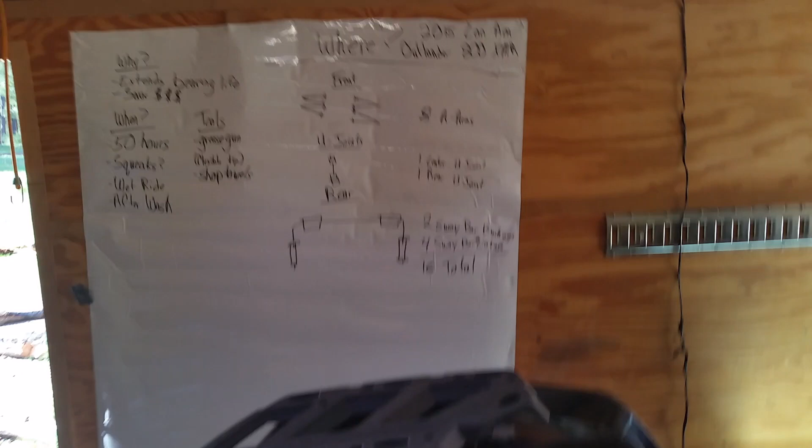I just cleaned up this 2015 XMR Outlander for its new owner. So y'all know what that means. It is time to grease it. Now, no one really enjoys jacking up these machines and getting under it to grease them, especially including myself, but I want to spend a few minutes talking about it this morning and show you the 16 grease fittings I found on this machine.

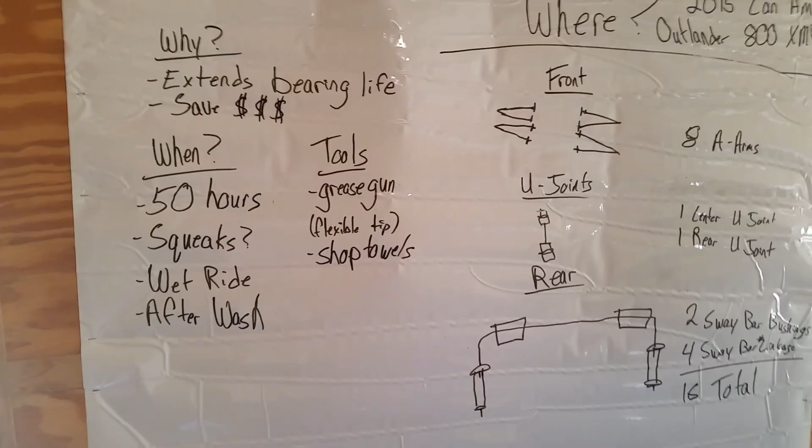Real quick, I wanted to address why to even grease these in the first place, and it'll extend our bearing and bushing life, and if it'll save the new owner money, that makes me happy, so good enough reason for me. The only other thing I wanted to address is when to do it, and the manufacturers mostly say around every 50 hours. Really, I like to do it anytime the machines start squeaking. You know, that'll help after a really wet ride or after a good thorough cleaning like we did on this one this week.

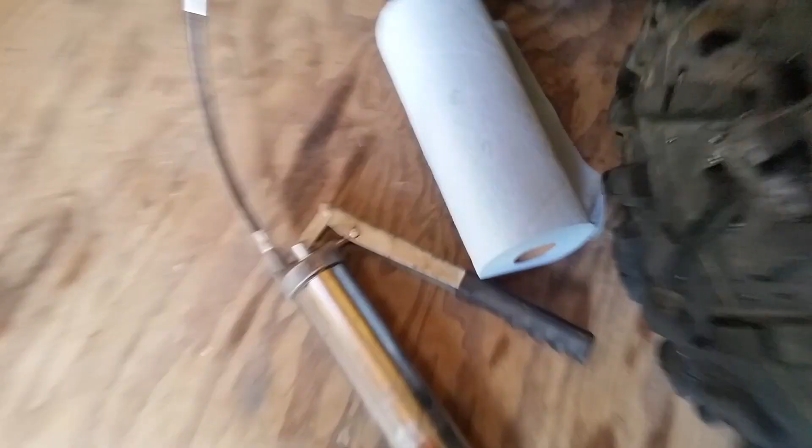As far as tools go, it's a really short list. Just a jack, a grease gun. I suggest one with a flexible tip. I got this one on Amazon for 20 bucks. A ton of shop towels, and that's about it.

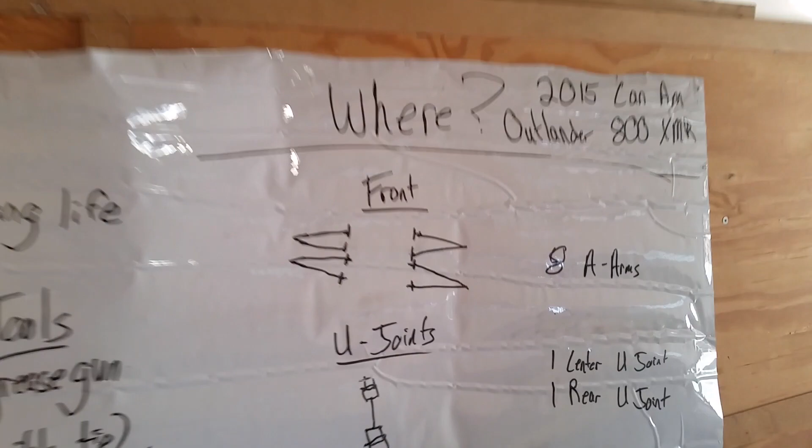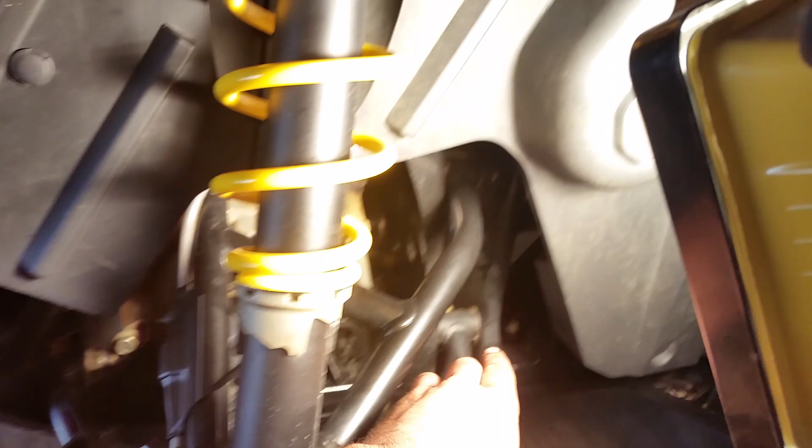So as far as where the 16 grease fittings that I found are located, I want to start in the front suspension, and that's with the A-arms. I found 2 on each of the upper and 2 on the lower, so 8 total in the front. We got one on the lower right there. Another on the lower, and to reach him you'll actually have to come in from the other side.

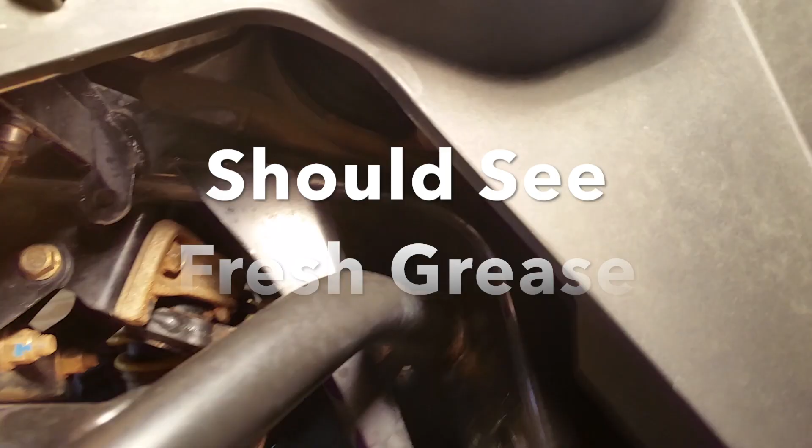And then 2 on each of the upper. Let's see if we can get in here and see him. You'll have to get that one from the other side as well. And then that one right there on the upper left. And of course the same thing for the other side.

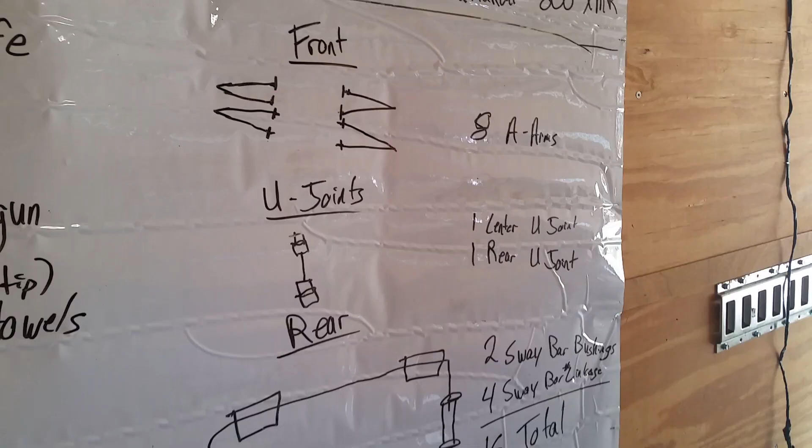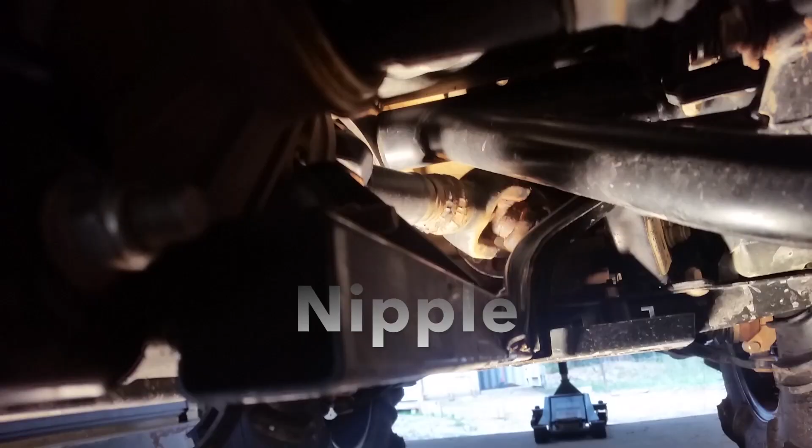Moving on to the U-joints, I only found 2 there. One on the center shaft right behind the transmission, and another on the rear U-joint right in front of the rear diff. Now our 2 on the U-joints are going to be this rear one right by the rear diff and this more center shaft up there. And when we jack up the bike, we can turn the wheels to get the fitting to line up with the skid plate so we can get to those. Another 4 inches. And stop. Perfect.

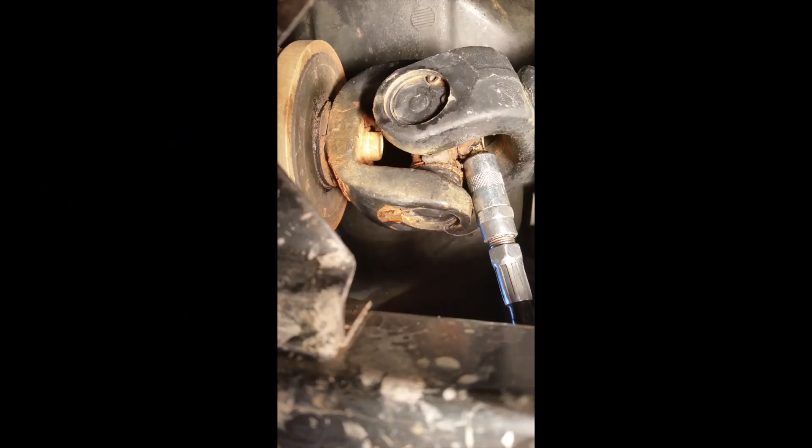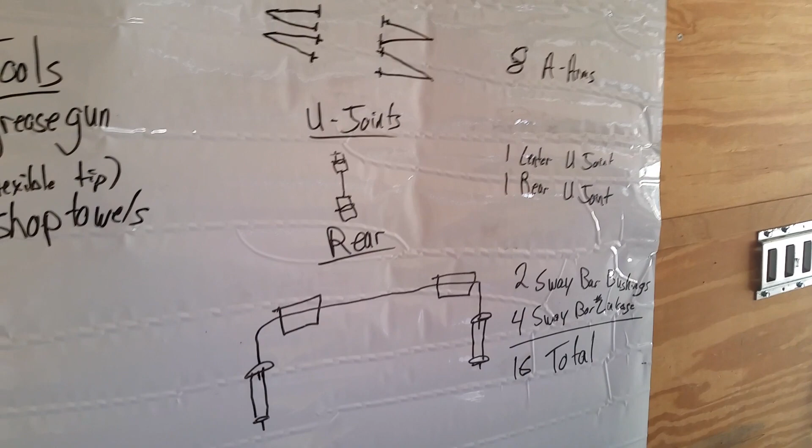I found 6 more in the back, starting with the 2 on the rear sway bar bushings and 2 on each of the sway bar linkage supports. I'm not really sure on the technical term on that, but let me show you where all these are real quick right now. They made the sway bar bushings really easy to get to. You can see the zerk right there.

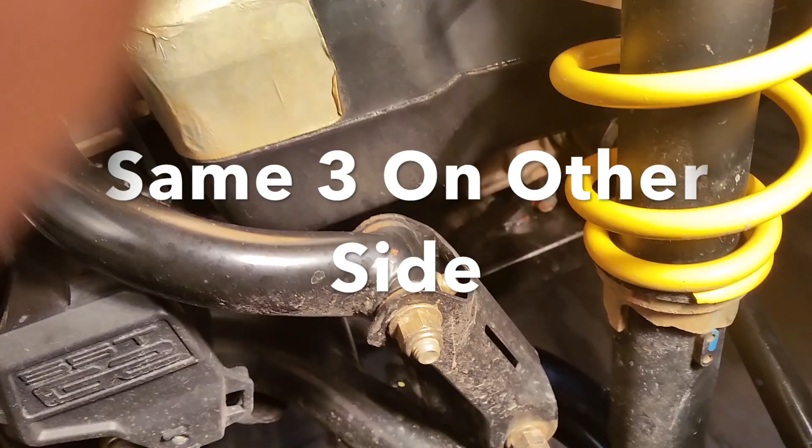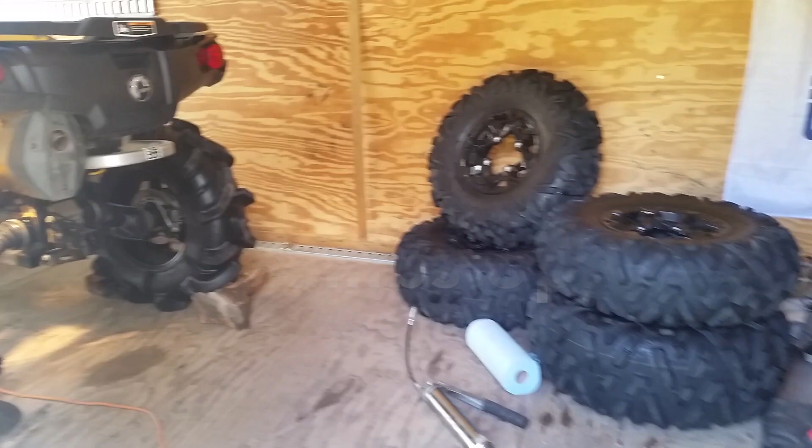And then as you come down the sway bar, you'll find one on the top of this support right here, as well as one on the bottom. If I can show it to you right there. So that's all there really is to greasing your Gen 2 Outlander or Renegade.